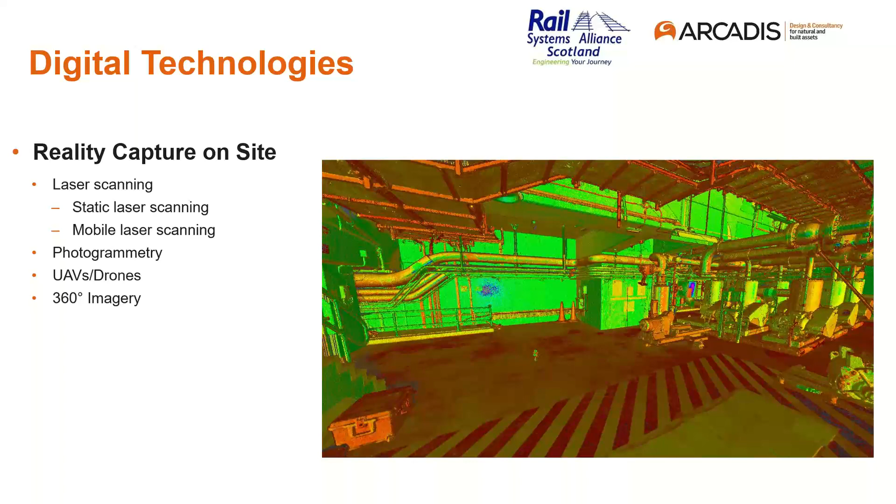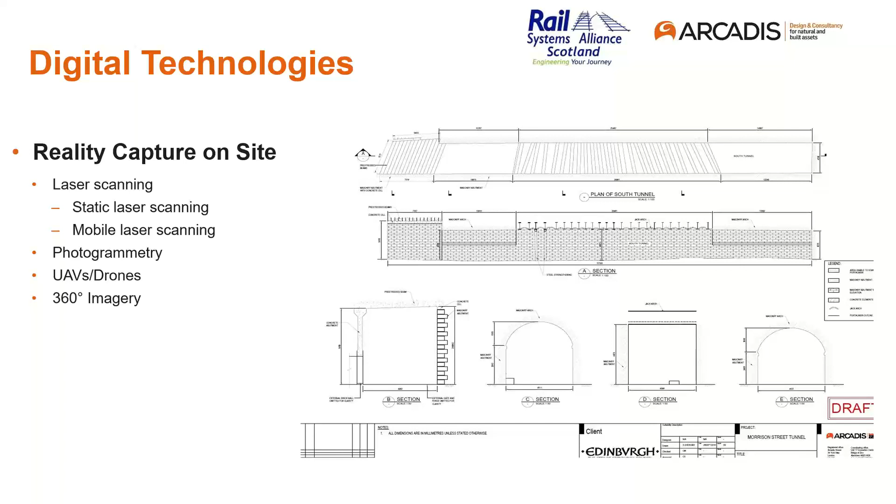So that's the point about laser scanning. Again, there's the static ones, and then there's the mobile laser scanning. Another technology which has existed for quite a while, but it's been improved dramatically over the last 10-15 years, is photogrammetry. Effectively, photogrammetry is creating 3D models based off of photographs or videos.

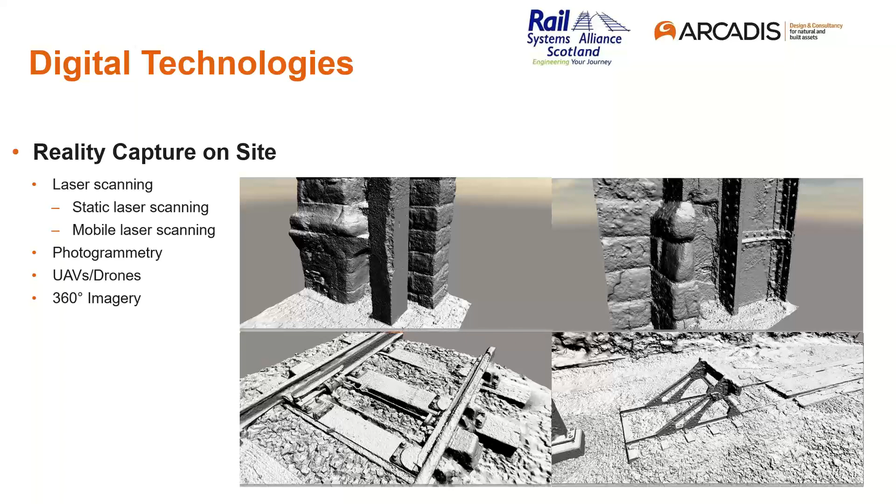So the 4 examples you can see on screen there, those are 3D models that I produced myself using my smartphone. So effectively collecting the information and scanning it with my smartphone, and then post-processing it on a laptop afterwards. You can see that the level of detail and the accuracy is actually quite high, and when it's used in the right context, it's quite a powerful tool.

Here's just a quick video which summarizes that, where I'm walking around a subject that I wanted to capture. I recorded a video in this instance. Actually, for the processing, I used the camera and still images, but that can then be used to create photorealistic 3D models, which, if you do it right and know how to do it, you can actually get something that's measurable and to scale, and that allows you to take dimensions and do some analysis work on that as well.

Something that's really useful to do for structural inspections and defect inspections. Obviously, you can do that at various different scales depending on what type of method you capture with and what the subject is that you're trying to capture.

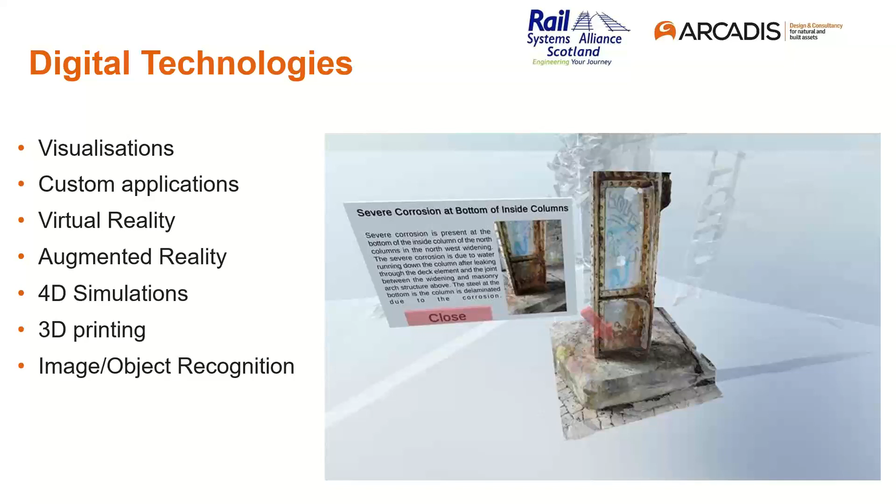A lot of what we do is standard visualization, but in terms of practical applications, we've developed bespoke solutions for clients. One of the more innovative examples is an inspection tool that we developed, which allows us to load up photogrammetry models and combine them with LiDAR surveys into an environment that's free of CAD tools or licenses, and allows the client access to all the information captured on site in a simple and easy to use color-coded application.

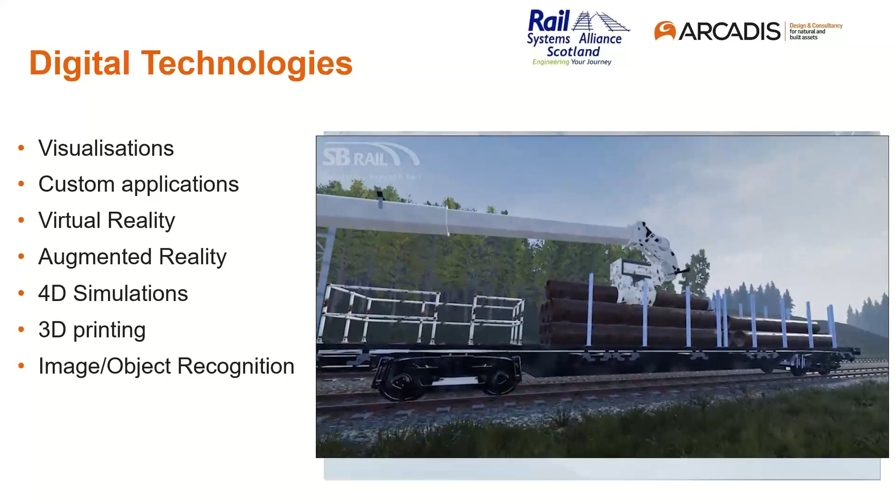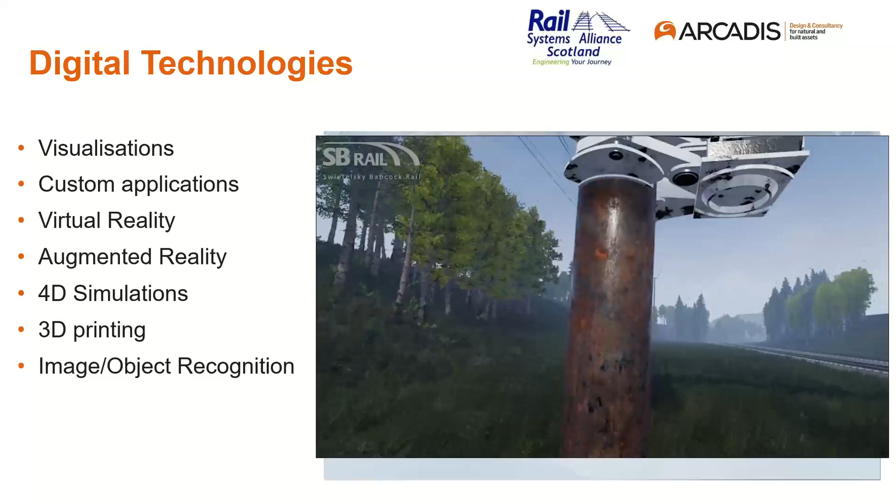I'm sure everyone at this stage has probably heard about virtual reality and augmented reality. This technology allows users to put on a virtual reality headset and visit a site and experience situations and scenarios within the safety of their offices or their homes, as is the current situation. And this really is a powerful tool when used correctly. It can bring users to site without the need to actually go there.

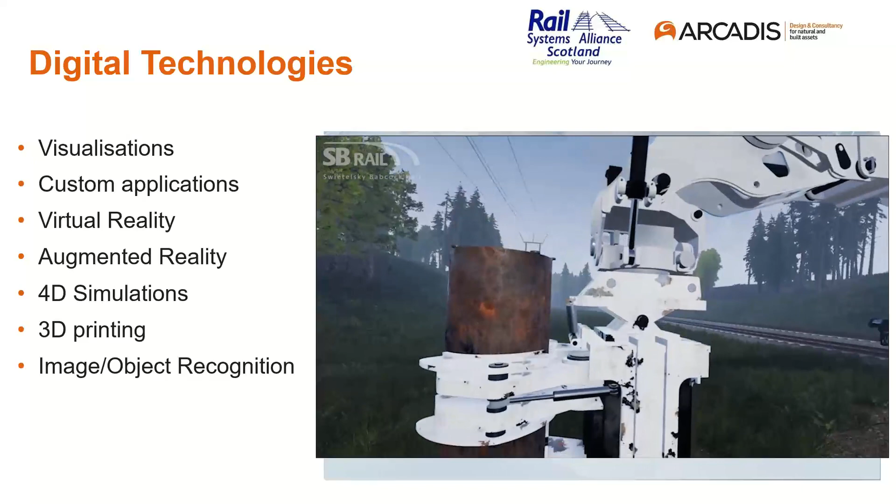We're using this in a number of different training situations, like in the example that you've seen above. This is a piece of work that we did for Swietelsky Babcock Rail, where we were essentially doing different simulations of the maneuver of this particular crane.

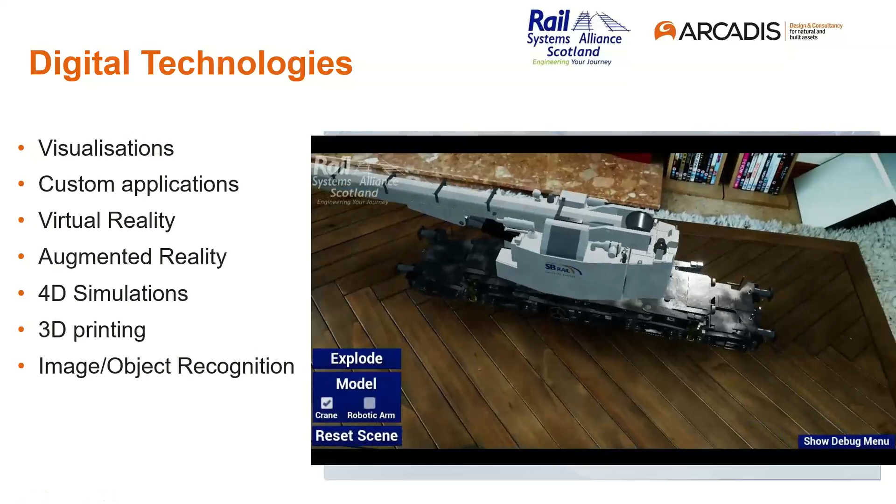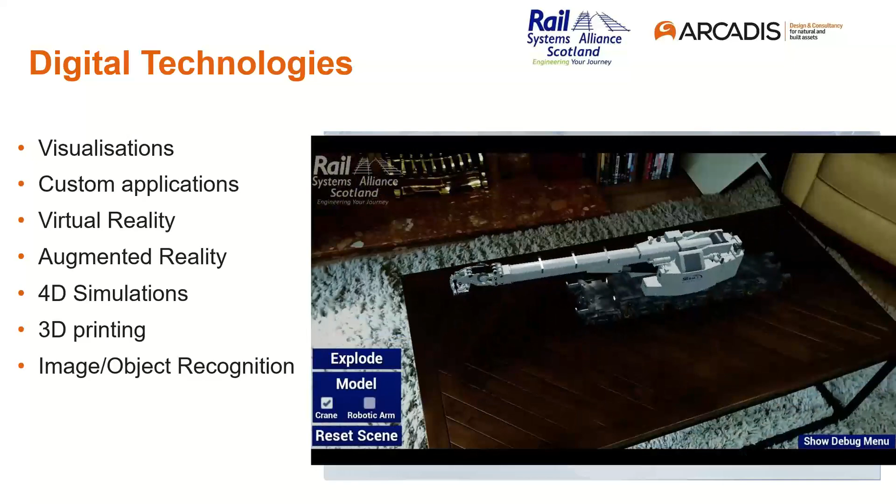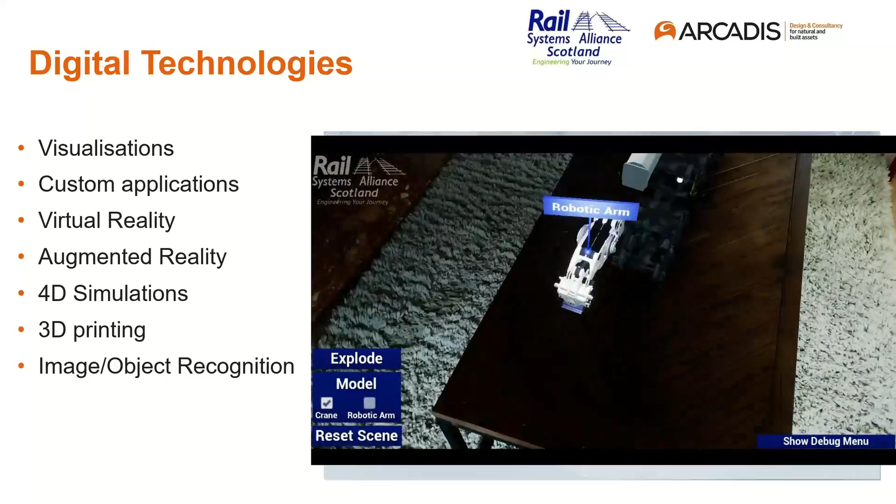The augmented reality piece. This is a short example of the same project, but it's allowed us to essentially, through a smartphone, load up a series of different 3D models and view them on your smartphone in the context of the real world. There's different uses and applications, but this is just one example that we put together. It allows us to create an interactive and slightly different application that allows users to view the information in a slightly different way, and we found it to be useful for different use cases.

So 3D printing, this is one that's not quite related to Cadder, but it's something that we're doing increasingly at the moment in terms of the digital technologies. Producing actual real-world physical models sometimes is quite a powerful tool to convey different messages across to different clients, and we've found that it's actually been really useful. Some of the instances that we've used are situations that you probably wouldn't think of straight away.

One of them that we did recently was for a bridge project in Edinburgh, where the City of Edinburgh Council had produced a fancy 3D model and a virtual reality experience to showcase their designs of the new bridge to the public. What they didn't realize is that one person that was super eager to check out this model was actually a blind individual. They understood the 3D model was going to be a physical 3D model and not an actual virtual model. So we ended up working with the council to produce a 3D print, a scaled 3D model of the bridge.

We took it a step further and we actually broke down the model into individual parts, and that allowed us to do a construction sequence building of the 3D model in different steps to explain to the individual that these are the different steps. This is essentially a 4D construction sequence of the bridge, doing the earthworks, putting in the walls and putting in the deck and stuff like that. And that was a really useful use case of the technology.

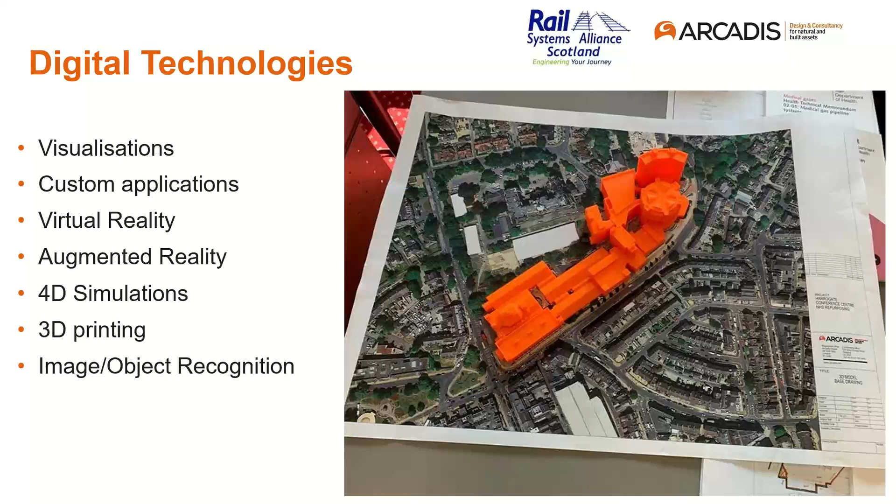So it's a good example just to show that there's often technologies out there that you might not think of for different solutions. We did some work for the NHS on one of the Nightingale hospitals as well, where we printed scale models of some of the hospitals for logistic reasons.

One of the interesting examples, which we're going to be seeing increasingly in the UK over the next couple of years, is the image recognition technology. At the moment, Arcadis are working in the US and in the Netherlands. We've created applications that allow us to mount cameras to the front of trains, simple cameras such as a GoPro, and use this tool, which was developed internally, to run through and analyze all of the imagery that will automatically detect different assets in terms of their location, their condition, and can then display that information on a GIS tool.

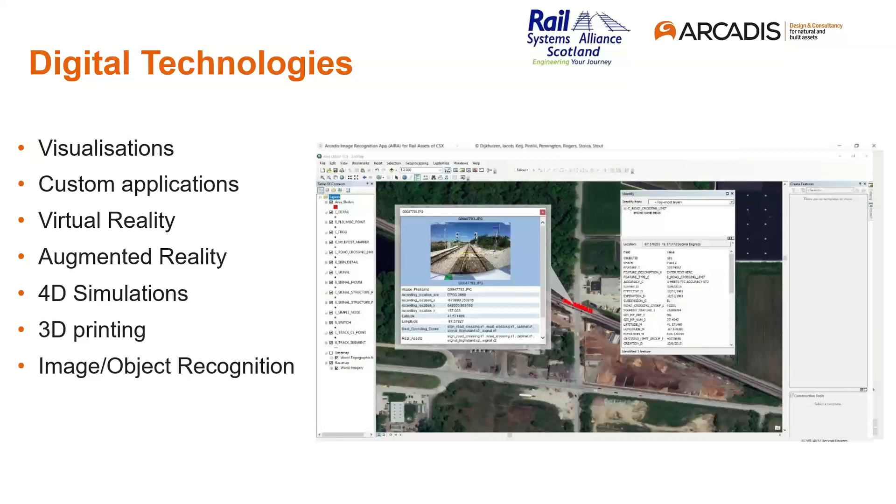And that's something that's really powerful, because the more sophisticated these get, the more practical applications come with that in terms of predictive maintenance and things like that. You can actually detect the condition of different assets over time based on the images, and you can then start doing some predictive maintenance and modeling from that. So that's just a look at the different technologies that we've been using over the last number of years.

Signal sighting. So I'm assuming here most people know what signal sighting is. I've got a couple of slides just showing it and explaining it, just in case anyone doesn't necessarily understand. But for all intents and purposes, a signal is effectively a traffic light for trains, and signal sighting is the process of ensuring that signals are visible to drivers in order to allow them enough time to observe, think, and act on them. It's crucial for maintaining the safe separation of trains.

So why is it so important? Well, a report found that in the Ladbroke Grove crash, or the Paddington rail crash, poor signal sighting was one of the leading causes of the accident. In this example, 31 people lost their lives and 417 people were injured. So it's quite important that signal sighting is done, and that it's done correctly. Obviously this was quite a bad situation. So the current design process hasn't changed a lot in recent decades.

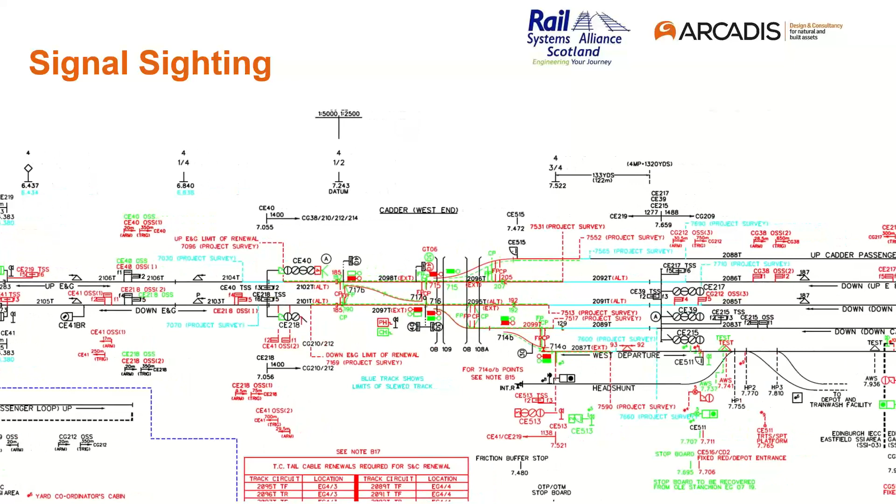At the moment, the signals are designed in 2D straight line drawings like the one you're seeing here. They don't factor in topography, track curvature, or local features such as bridges and structures. The proposed locations are established here, and then they're investigated on site to ensure that they're in a correct location. This leads to an iterative design process where the design is done in an office. Someone goes out on site to check it, which isn't the most efficient way of doing it.

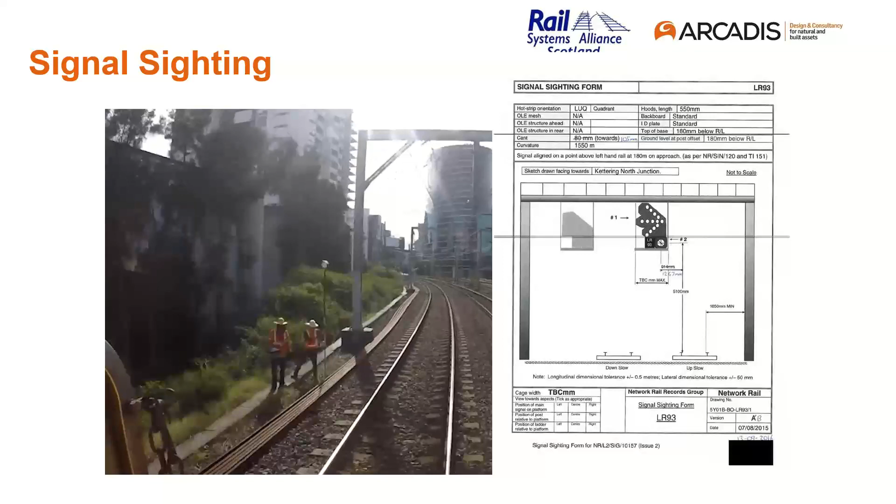As you can see here in an example, you've got a train driving, and then someone's erecting a proposed signal location. So this can produce results of varying quality. So digital solutions do exist. There's a whole raft of different options out there. Some of them are offered by certain companies as a service. Some of them are software based.

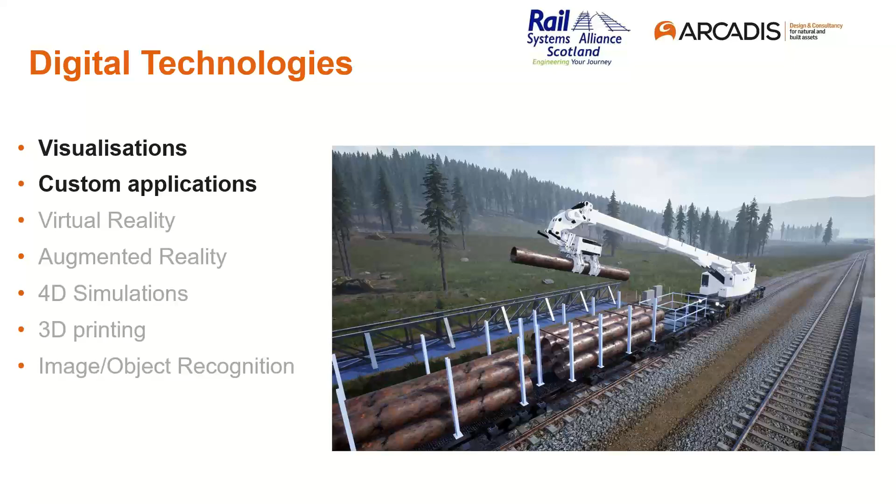But for the Rail Systems Alliance Scotland, for Cadder, we decided that we would try and develop something bespoke ourselves. With Cadder, we're actually doing quite a bit of visualization work, and we're designing custom tools anyway. So this was an example of one that we decided to do ourselves. We've got great experience in developing these tools and producing high quality visualizations. So it made sense that for this particular example, we can just develop our own bespoke solution for doing the signal sighting.

And with that, I'm going to change to a live demo of the software. Fingers crossed it goes smoothly.

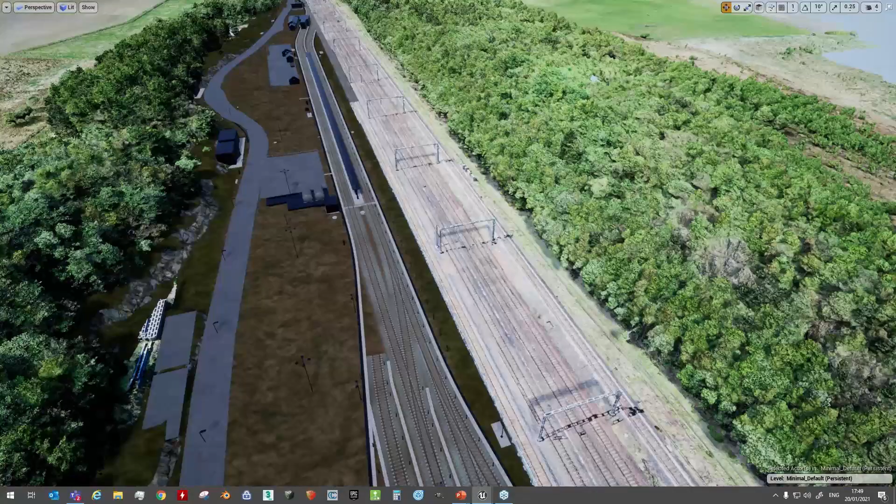So what you should be seeing here is a 3D model of Cadder. What you're seeing in the distance is the actual 3D model of the aerial survey that was captured on site. So you can see the existing piece of track, which is about 3 kilometers long. What you're seeing on the left-hand side is actually a proposed depot. So there were 2 bits of work going on here for the Rail Systems Alliance Scotland. There's the track renewals on the main line, and then there's a depot that's actually getting constructed here.

So part of what we did, because we're going out on site and we're capturing all this information, we're doing the drone surveys, we're doing the visualization, it made sense to develop a signal sighting tool.

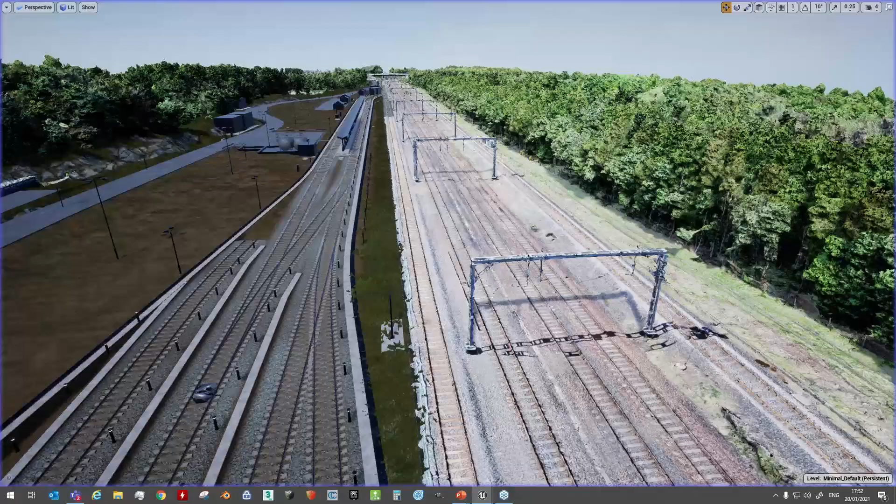So without going into too much detail as to how we've actually done everything, there's some smart stuff that goes on behind the scenes in terms of how we've developed it. One of the things that we wanted to focus on was automation, and how do we automate this process and make it scalable on any project. One of the things I learned in this project is that a lot of people tend to revise their designs quite extensively, and what we didn't want to do was spend a lot of the time constantly iterating and modeling stuff from scratch.

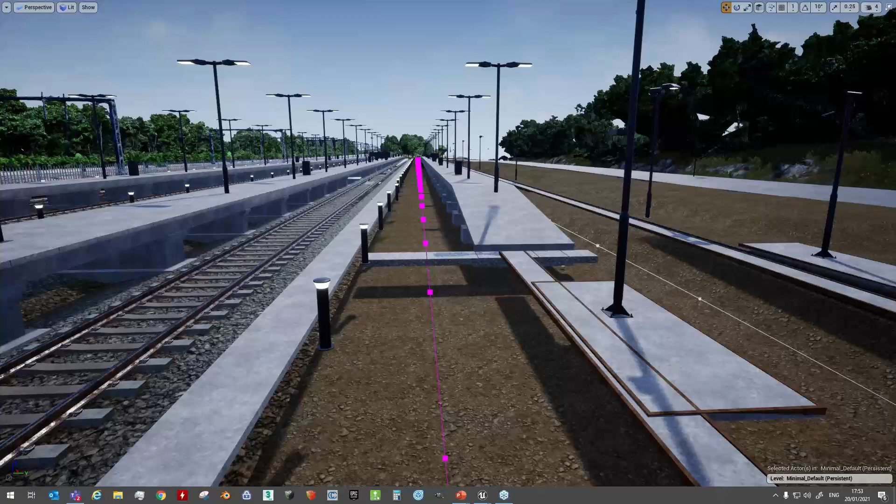So one of the things we developed, which was essential, was a way of actually automating the process of modeling the tracks themselves. So I'll just show you an example here. What we've done is we can automatically convert a spline design of the center line of a track directly into a model. If the track people were to revise the design and change any of the parameters, we can automatically generate a brand new mesh that fits the profile of that track with the simple click of a button.

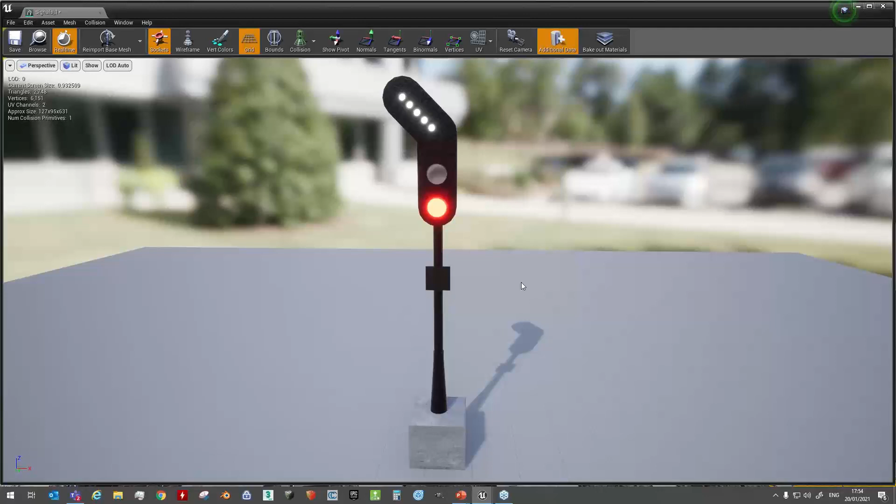And it turned out that was a wise call, because as you guys probably know, the track people like to revise and change their designs constantly, which ultimately saved us quite a bit of time having an automated way of doing that. And same for the signaling. We developed an automated way of importing all the different signals based on spreadsheet data. So effectively, if you had 10 signals or 1,000 signals, you would just import a spreadsheet and it would automatically populate the entire piece of track with all the signals in the right location, and that would allow the process to be as automated as possible.

This is actually a good example because everything you see on the right hand side here is part of the BIM model that was just imported directly into the software, and we've got some semi-automated processes to speed up how we import these models. So one of the main takeaways here was that we're developing something that's as automated as possible due to the constantly changing nature of the actual design of this project. Having the automated process was actually a godsend and allowed us to automate the whole signal sighting process. If there were any changes in the design, they just got automatically updated.

One of the things that we also added was the ability to fly around the model itself and have something that would automatically detect the distances between the camera and the signal. So you can see as you fly away, it gives you that distance, so that we were able to identify at what distances something was obstructed, or at what level we needed to move some stuff around. So we ended up with this really interactive tool that we sat through with the signal sighting committee, went through the whole project, checked it from a number of different trains, and we were able to change the perspective and do the whole signal sighting process interactively.

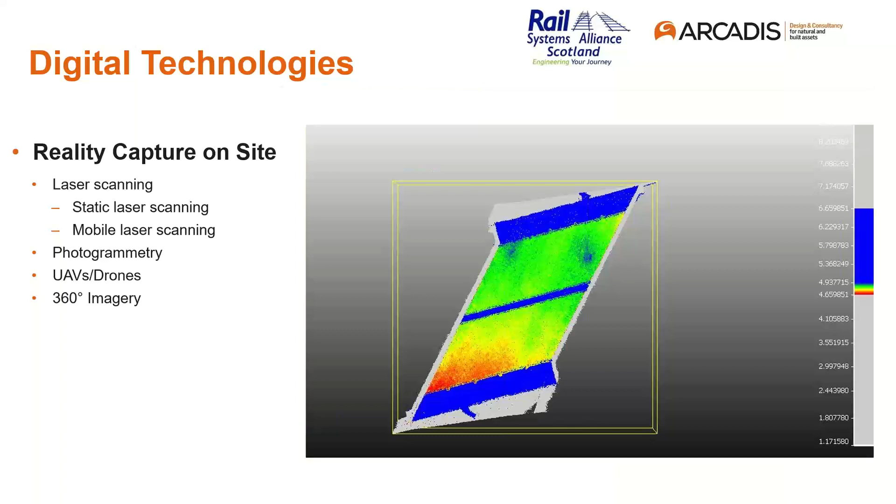A question about the capturing of information first from me. Precision of recording: you mentioned you're capturing it on your own phone, but with photogrammetry, that kind of LiDAR non-contact system, what kind of precision does it have? It completely depends on who's capturing it, how they capture it, and specifically what they're capturing. There's no magic solution that will do everything you want really easily, really cheaply, really quickly, and really accurately. There are always going to be trade-offs between different technologies.

Photogrammetry is very good at capturing wide areas using drones. Effectively, the bigger the model that you're scanning, or the bigger the area that you're capturing, you're either going to see a trade-off in accuracy or a trade-off in processing time. So if you want something that's very accurate over a wide area, it's going to take a very long time to process with very powerful machines.

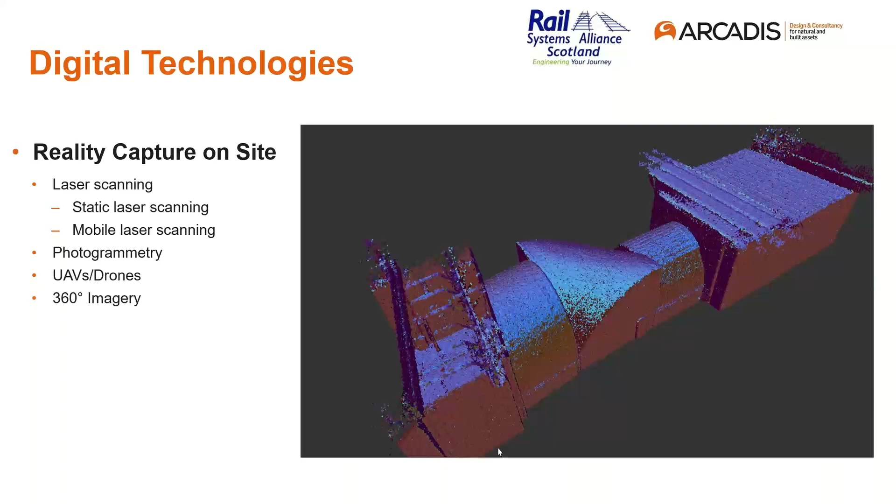Whereas some of the examples that I gave here, which are just small individual 3D models of specific defects, like these ones, probably took me maybe 30 seconds to 2 minutes to capture the photos of each one, and then were processed within about an hour, because I knew the process and the best practices for it. This is accurate.

I've seen studies done where people have it as accurate as laser scans, but it all comes down to the method of how you've captured it and what you've captured. Because if you try and scan the Forth Rail Bridge, something of that scale, it's going to be a lot harder to do over such a wide area, which is why LiDAR is still really useful, because it is 100% accurate. When you do it properly, it doesn't give us as good models in terms of the finished quality, but it is more accurate.

So it's a bit of a politician's answer, because it kind of depends. Your accuracy can go from a few mil up to a couple of meters if you're scanning from a drone super far away and you're capturing a wide area. But you can get them really accurate, and I have seen studies where on certain sites they've got a comparable result between photogrammetry with the smartphone and a laser scanner. But some people will extrapolate that and understand that photogrammetry is just as good as laser scanning, which isn't actually true, because they do things slightly differently.

We're just trying to get away from the idea that because it's captured by laser, it's super accurate. We've had LiDAR plus or minus 25, okay up to a certain GRIP stage. You try and do AIP GRIP 4, LiDAR's not good enough. You need plus or minus 5 topo. So it's one of those things. It depends on how you capture it. Even LiDAR, as you're aware, is liable to that.

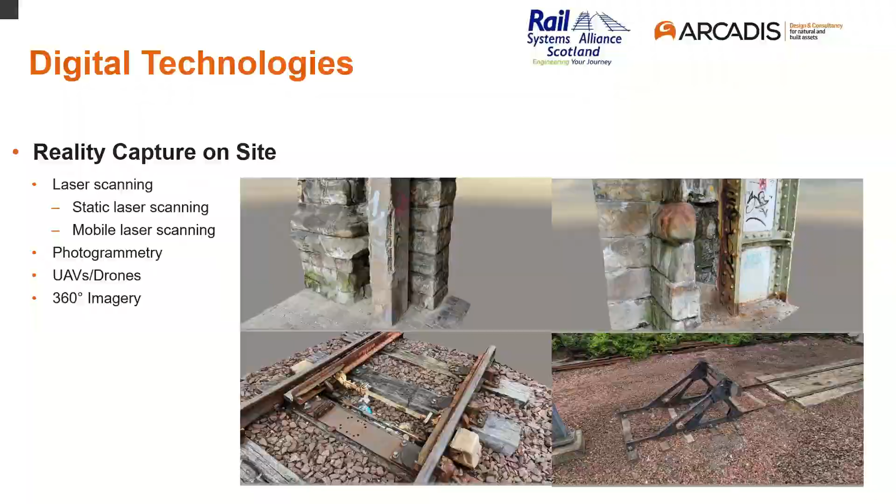Killian, I've thoroughly enjoyed your presentation tonight, finding it absolutely fascinating, particularly from the point of view of interdisciplinary integration. Have you found in this work at Cadder that there has been some reluctance from their signalling colleagues to accept absolute coordinates rather than schematic drawings with chainages and offsets? I know my good friend Harry Archibald is on here tonight, so Harry, don't take offence. It's something I have tried to do in previous projects without success.

So the team that we've worked with in terms of doing the actual signal design, they were within the Alliance, within the Rail Systems Alliance Scotland. They were actually involved in this from the start, so they were part of the design team for this. So they embraced the way that we worked in terms of giving us real world coordinates, and because they were working alongside the track guys and the signaling guys, everyone working together, it was something that was relatively easily produced.

It's not something that they usually produce, because as you said, having real world coordinates wasn't something that was done normally, but because they were involved in this from the start, it's something that we adapted and basically implemented into the project. So I would say, and I don't know if I was just blessed with a good team that were happy to all collaborate together, but it was actually quite easy implementation for us.